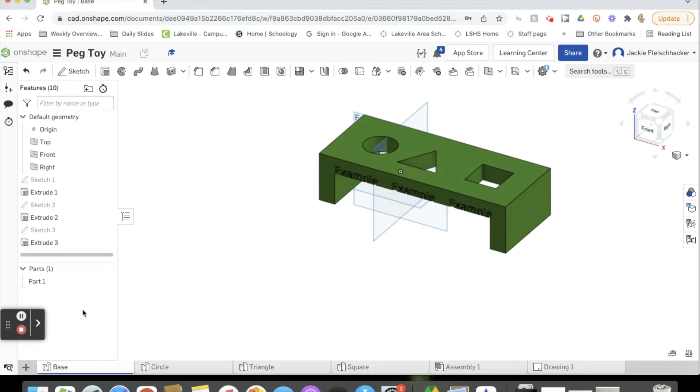All right, so we're gonna make one or two more parts. So we're gonna make a little hammer and a handle for this peg toy. So I'm gonna add a new part studio, and I'm gonna call this hammer head.

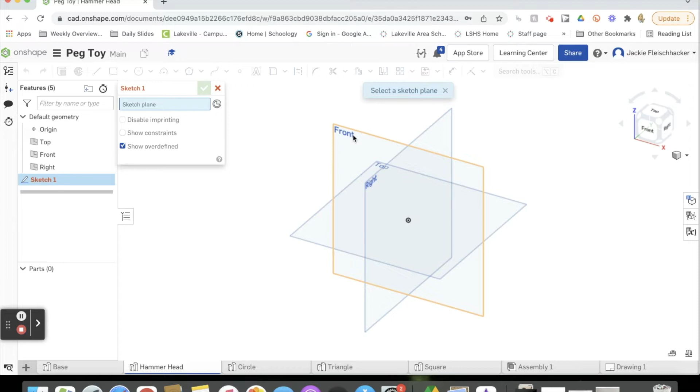So for this piece, we are actually going to be using a new tool called the Revolve tool, which is really handy for making round objects. And you'll see what I mean here. So we're going to start by doing a new sketch. And let's go on the front plane. Sorry about that. Front plane. And I'm going to rotate to view it from the front.

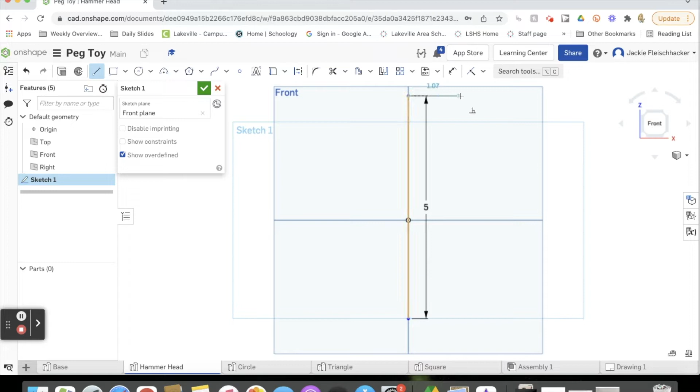So basically, I'm going to be drawing only half of my silhouette of the hammerhead. So I'm going to grab a line tool, and we're going to go right down the middle here. So straight down, and I'm going to set this to be 5. And then going straight out, we're going to do this 1.5 at the top. I'm going to hit escape, or not. I'll turn off the tool, turn it back on, and do the same thing at the bottom.

All right, so then we're gonna make it, escape line, kind of a little curvy shape in here. So with our line tool, we're going to go down 0.75, and same thing on the other side. And then escape line again. So I'm right clicking to get to the escape line.

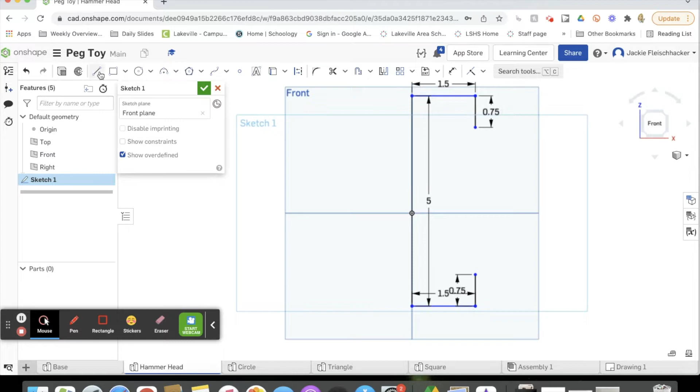So we're going to kind of hover over this top point here, and you can see that it turned yellow, and then I get this yellow dotted line. And like in the middle, I'm just going to draw a line. So those dotted lines just tell me that I am perfectly in line with this top and the bottom. So now that we have this line drawn here in the middle, we want these two spaces of the top and bottom of it to be equal.

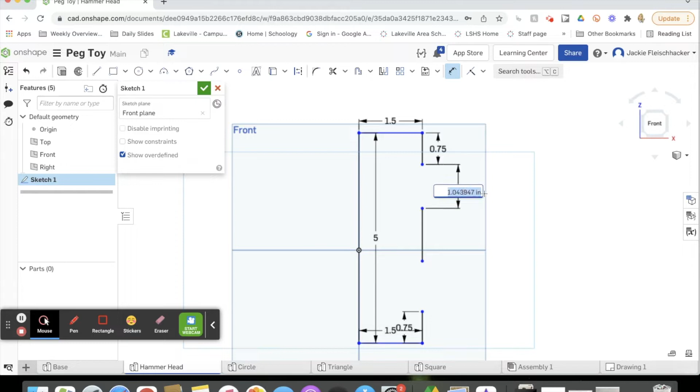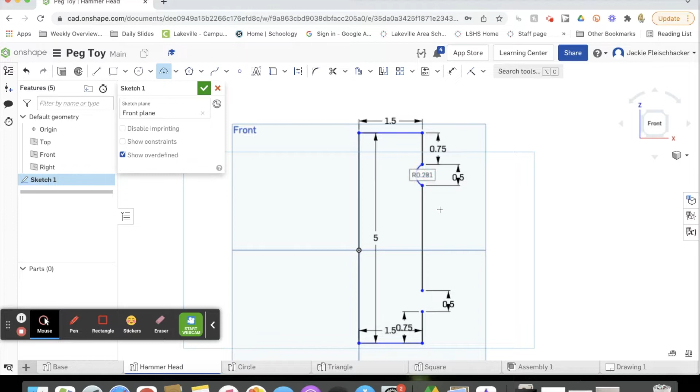So we're going to grab our dimension tool and choose 2 points on either side, and we want to set this to 0.5. And down here, set this one to 0.5. So now it's the same gap there. And then we're going to grab our 3-point arc tool. And let's do it at 0.25. All right, so we have both of them set at 0.25.

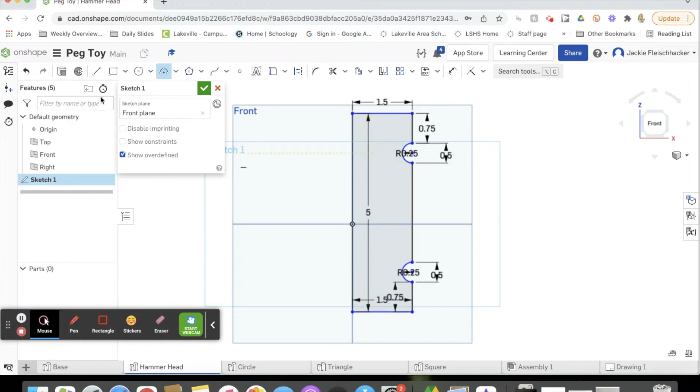So this is half of our silhouette of our hammerhead that it's going to rotate around using our revolve tool. So this is what we have going on here. I'll move some of this out of the way so it's a little bit easier to read. All right, so those are all of those dimensions. So we are going to finish the sketch.

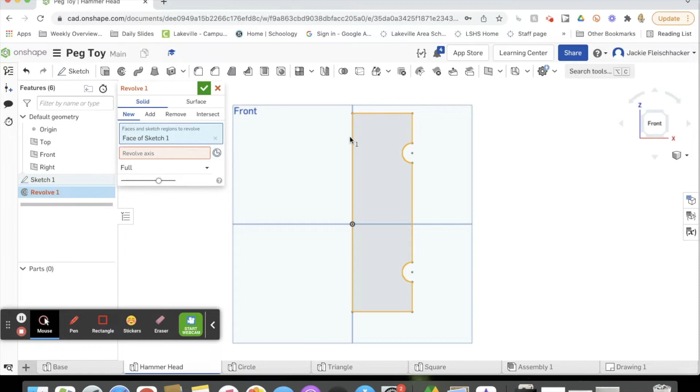And this is our revolve tool. So when we click on this, it's going to be a solid. We're doing new. So in this blue section, it says faces and sketch regions to revolve. So you want to click on what sketch you want to revolve. So I want this one that we just did. And now it says the revolve axis. Now we got to click on the axis that we want it to revolve around. So it's going to be this one. There we go. And now it kind of looks like a little toy hammerhead. So we just click the green check mark.

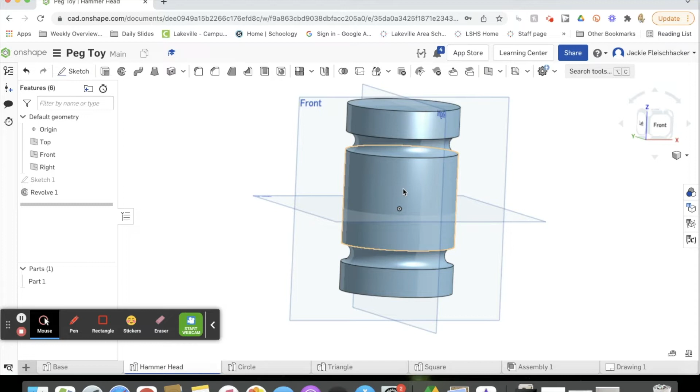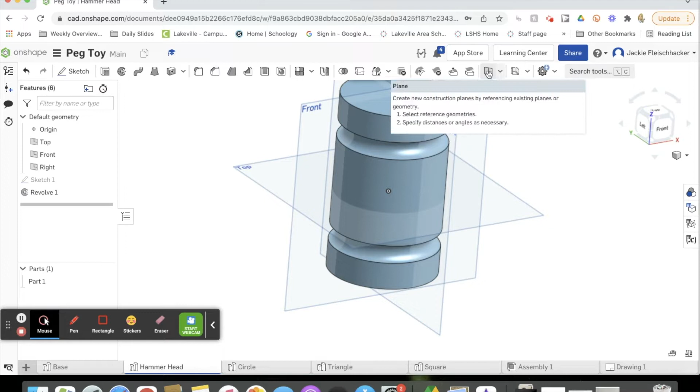So now that we have our hammerhead done, we need to make a hole on here so that it can attach to our handle. So none of these planes are right on the surface of this round barrel part of our hammer. So we're going to need to make a new plane so that we can cut a hole only part of the way through our hammerhead. Or all the way through, actually, is what we're going to do. So this button right here says plane. So we're going to be creating a new plane. That's, right, front, top are all planes.

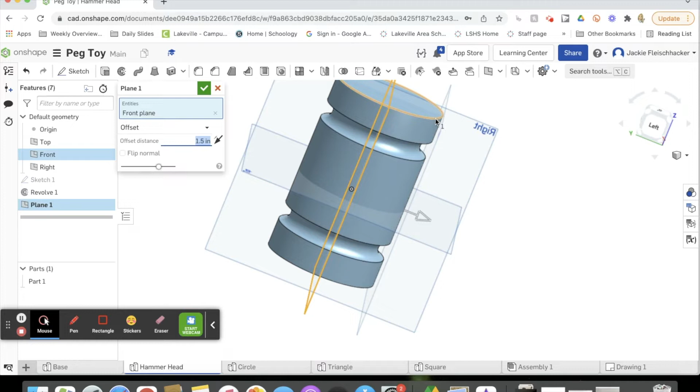So I'm going to do it from the front plane with an offset. So I believe an offset of 1.5. There we go. Because when we drew that straight line out, that was 1.5 out. So I knew that measurement. So now that plane, if I zoom around, is right on the edge of our round surface. So I'm going to click yes. So now we have this plane 1.

So we're going to do a sketch on plane 1, and it's lined up with our front plane. But now we want to make sure our hole is centered on this, what looks like a square right now, but it's not really a square. So we're going to use this point. So I'm just going to kind of click this point, and I know that this line right here is directly down the middle of my hammer because of how I drew it. If you didn't do it the same, you're going to have to do a little bit extra dimensioning, but I'm just going to click a point in there. So this little blue point.

So now I can grab my dimension tool and I can dimension from my point. From the sides, I can't do it, so that's why it was nice that it was lined up. I'll show you here in a second how to do that if yours isn't lined up, because you can see my lines aren't highlighting there. But I can go to this top one, and that is 0.991. Let's see, 1 inch. And if I go from, oh, that's definitely not going to be enough. I was not guessing that right.

And that one's 1.5. So if I had both of these here, because I typed in this number, it made it black, and that's like the strong measurement. This one is just there for reference. So if I were to change this one, it won't even let me, honestly. So I know that I need to even these out. I want this one to be 1.25. And now they both are 1.25.

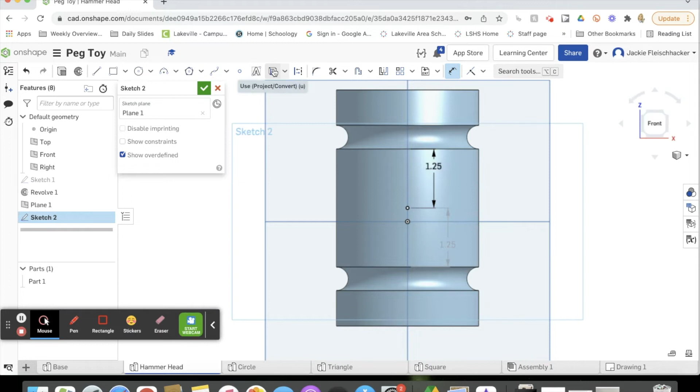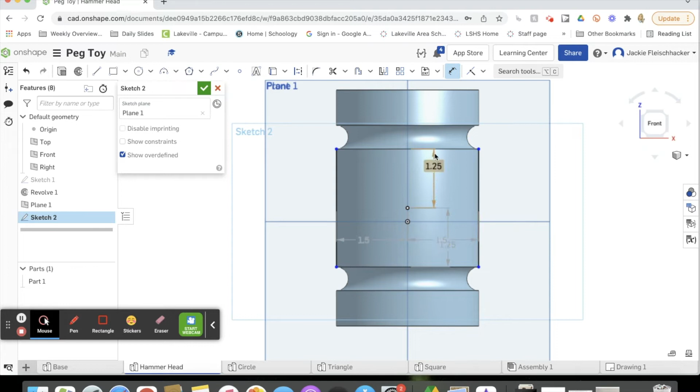So if you didn't do your middle right along this axis here, to be able to dimension to these lines over here, we're going to use this use tool. What this does is you can click on a feature, and now that line is usable to be dimensioned to. So then I can grab my dimension tool and go from my point to the side, and I know that's 1.5. I can go to this side, 1.5. So we need it 1.25 from the top and bottom, 1.5 from the sides. And we are going to finish the sketch. So now we have this little point that's just chilling on there.

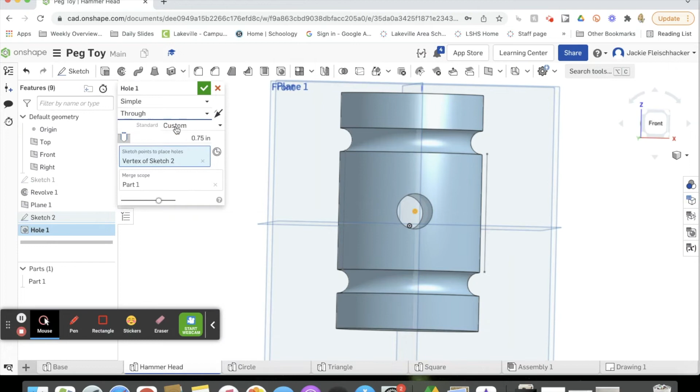So we are going to grab our hole tool right here, and we are going to choose that point. With this hole tool, you can do a lot of crazy things like threads, counterbore, countersink, make it go through. We are going to make it go all the way through, and our diameter is going to be 0.75. We're not going to do any of the crazy things right now. Eventually you might learn that, but right now we're just going to do a simple through 0.75 diameter right on that hole that we drew.

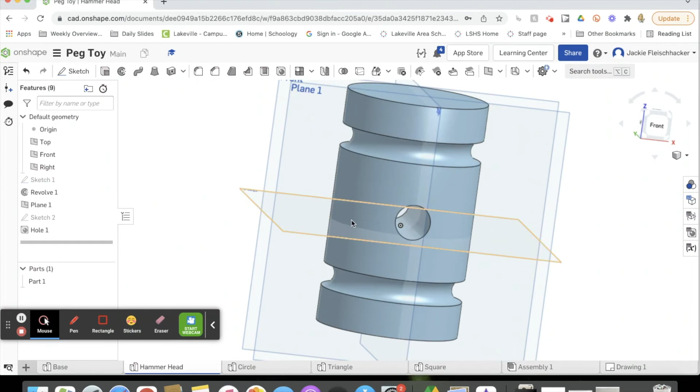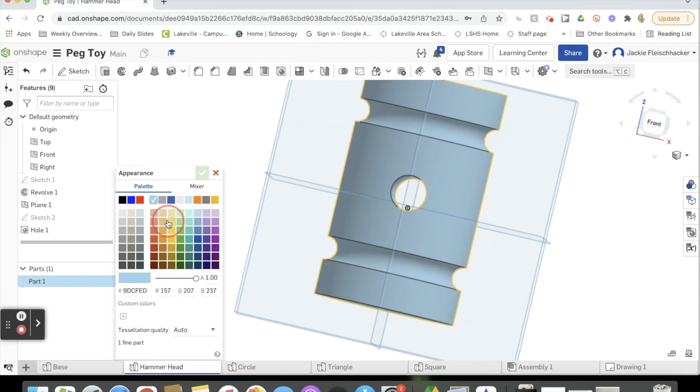And there that is. So I'm going to make this a color. Assign material. Oh, not material. Edit appearance. I'm going to do like a goldish color. All right, so there is our hammer head. So real quick before we move on, we're just going to do one last little thing just to clean this up a little bit. To make it a little easier to see what we're working with, I'm going to actually turn off these planes here just by clicking this little eyeball next to them all, so I just see my hammer head.

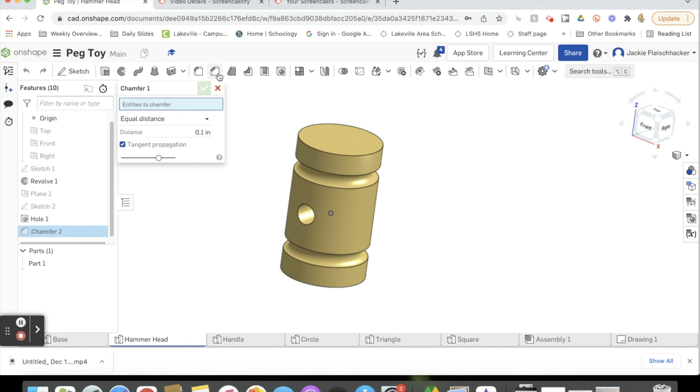So we're going to use a tool called chamfer on our top edge up here and the bottom edge, not to round it, but to add a little bit more dimension to it. So we're just going to click chamfer. We're going to click this top edge up there and this bottom edge, and we're going to do a chamfer of 0.1 on both of those. It just gives it a little bit more finished look, like if we were to round it a little bit on a saw.

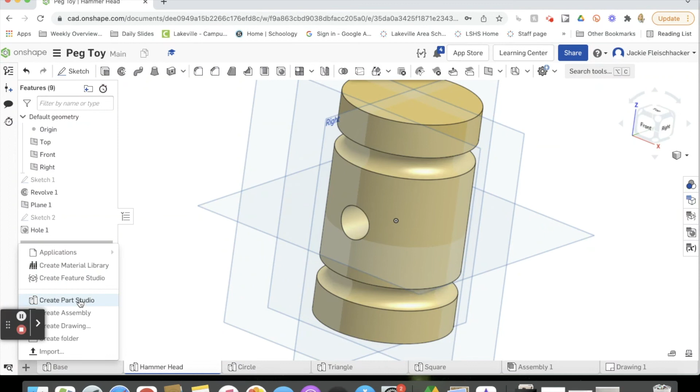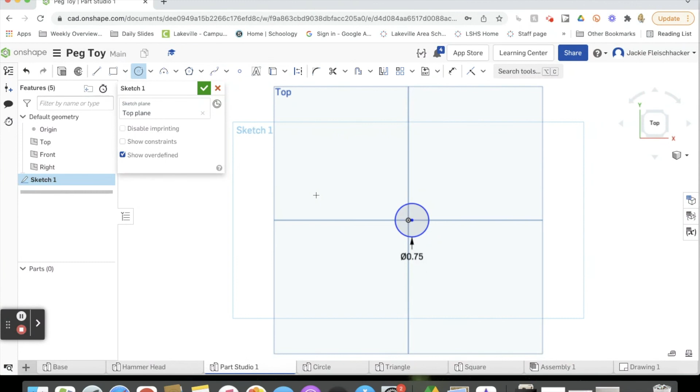Next, we're going to make our hammer handle. This one is super simple, kind of like the circle peg. So we're just going to do a sketch. I'll do it on the top plane. And we're going to draw a circle. So that is 0.75. That's the size of that hole that we drew. And instead of doing finish the sketch and then choosing extrude, I'm just going to click extrude right here because I know that this is what I want extruded. And this is going to be 12 inches.

And I'm going to do finish. I'm going to make it the same color. And I'm going to call this handle. All right, so that is how you make your hammer head and handle.